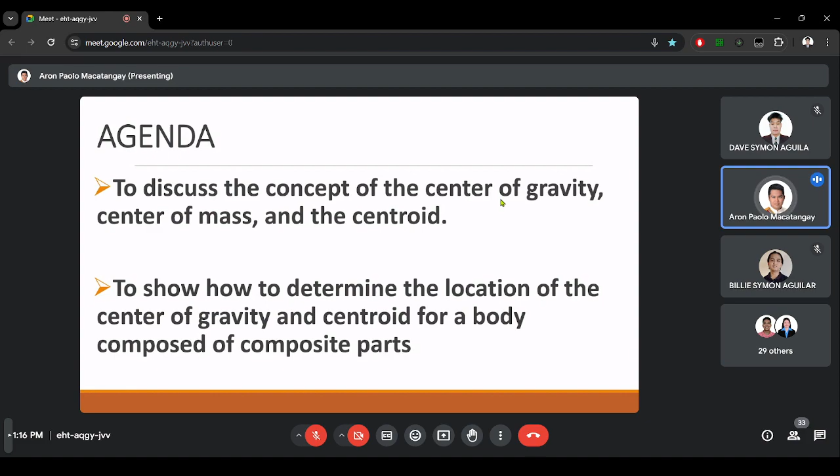So for as far as now, ang ating pagsasolve ng mga problems in cases when we are considering yung weight of the body. For example, kung maalala nyo, isa ito sa mga problems sa equilibrium, yung nasa left, tapos yung nasa gitna, tsaka yung nasa right, problem yan sa friction.

Okay? Ang ginagawa natin, automatic na natin, sometimes sa problem, yung tulad sa nasa left, binigay ng problem yung location ng G or kung saan location mo i-apply yung weight ng object.

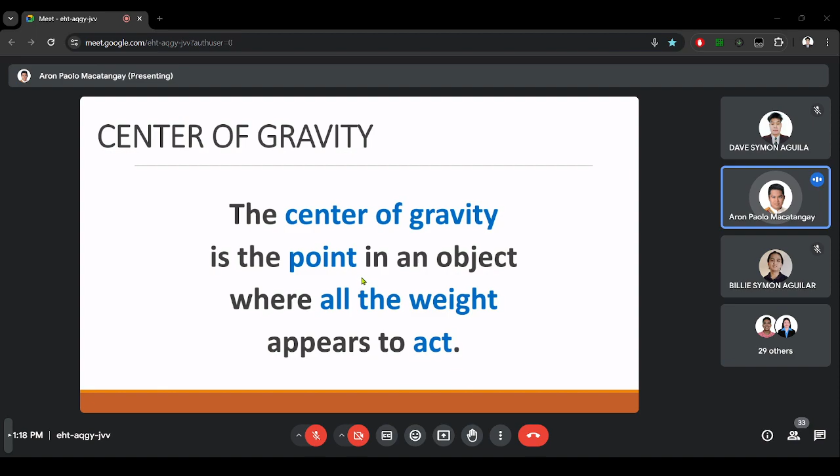Okay, so today we will be discussing saan nga ba dapat nilalagay yung mga ganyan. Bakit nga ba siya sa gitna? Okay, so yun yung, kaya natin siya nilalagay dyan sa location na yan is because dun yung center of gravity ng object natin. The center of gravity is the point in an object where all the weight appears to act. Okay, ibig sabihin, kahit malaki yung object mo, pag dun mo siya binalance sa center of gravity, it would appear or it would act na lahat ng mass is nandun lang and kaya mo siyang i-balance at that point.

Okay, so saan natin nakikita yon? If you know this toy, it's called the balancing eagle, uso to nung time namin, is kaya mo siyang i-balance sa isang finger mo. Right? It's because of the shape of the toy, the weight distributes such that the center of gravity is at the tip of the beak or the bill of the bird.

Okay, ibig sabihin, pag doon ko hinawakan yung toy, yung weight niya is nako-concentrate doon. And since nahawakan ko siya ng finger ko doon, parang nababalance ko yung object doon sa point na yun. Same with a ball, if you are very careful, kaya mo rin siyang i-balance sa finger mo. Kailangan mo lang i-imagine na lahat ng weight ng ball dapat mababalance doon sa gitna ng finger.

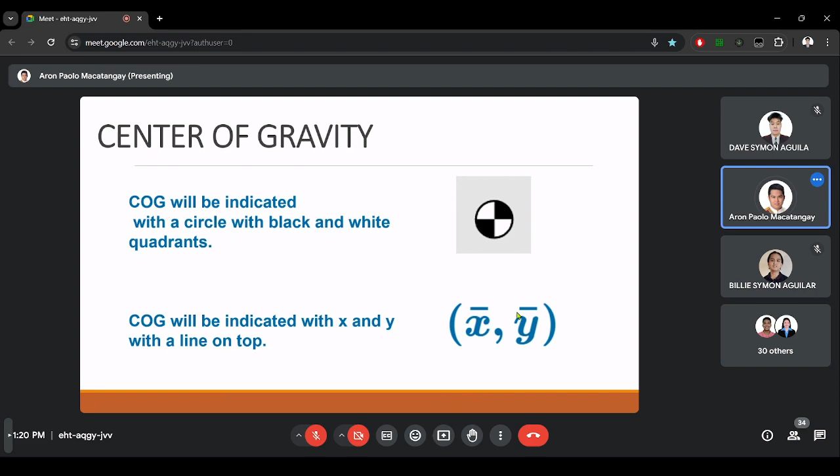Okay, so the purpose of the center of gravity is nandiyan yung center of the weight effect ng object natin. Okay, so ang ating magiging tawag dito, representation for that, we will indicate that with a circle, tapos may black and white pattern sa quadrants niya, tulad dito, opposite yung naka-shade. Tapos pag naman lalagyan natin siya ng label or coordinates, lalagyan natin ng x and y na, pero lalagyan natin ng bar sa ibabaw. So halimbawa, kung nasa 10 mm yung x coordinate niya, then 10 na may bar sa ibabaw yung susunod. Right? For y naman, ganun din.

So pag nakakita ako ng free body drawing or diagram, ganito yung makikita ko. Okay, meron akong mark dito for the center of gravity, may bilog siya with stripes. Tapos yung dimensions niya, dapat may bar yung value sa ibabaw. So I would know that dimension corresponds to the center of gravity of the object.

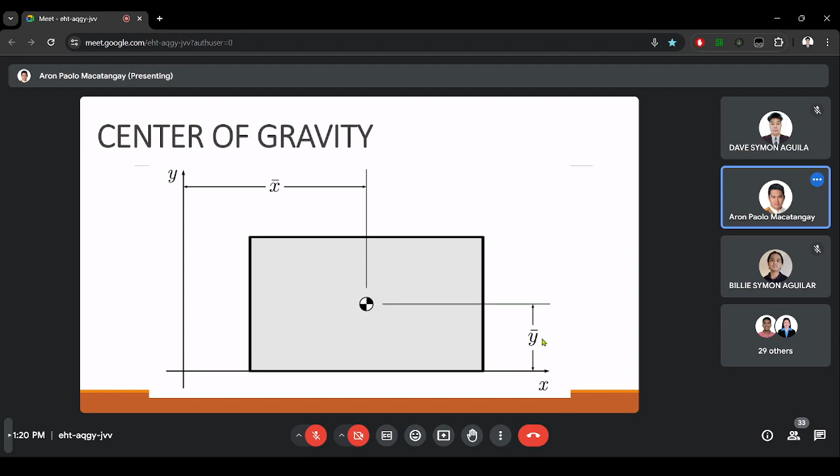So ano bang concept or saan ba nakakatulong yung center of gravity? So imagine nyo, meron kayong ball pen. Okay, and most ball pens, nahahati siya sa dalawang piece, yung part na may tip, saka yung part na may handle. Okay, sabihin, each part meron silang sariling center of gravities nila. And that means yung weight of every section is concentrated on those parts such that I can do a moment about point O of those two parts. Okay, so makikita nyo, both parts can cause a clockwise rotation or clockwise moment with respect to point O, which means iikot or papatak yung ballpen natin if we try to balance it at point O.

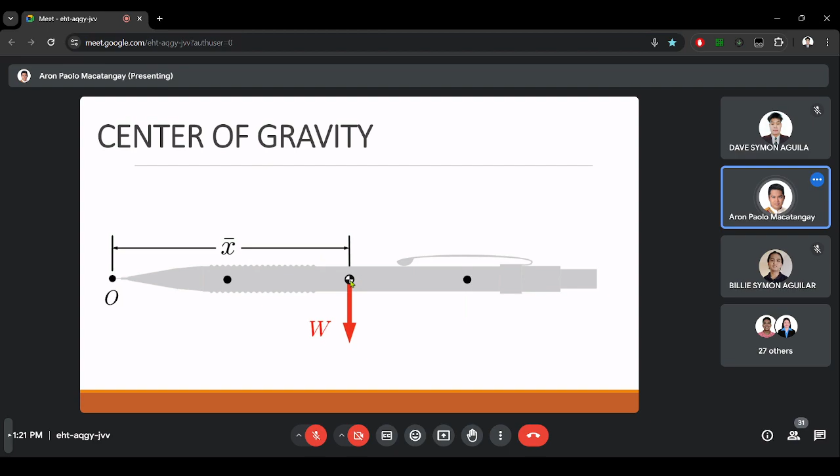What we do with the center of gravity of the whole pen is we balance it sa gitna, such that the weight on the left side and the weight on the right side—pag nag-moment ako about the center of gravity, yung nasa left side will cause counterclockwise rotation, yung nasa right side will cause clockwise rotation, and both will be in equilibrium.

Ibig sabihin, pag nilagay ko yung finger ko dito sa gitna ng pen, hindi iikot yung pen. Magbabalance lang siya on the tip of my finger. Ibig sabihin, pag sa COG ka nag-balance, dapat ma-cancel or mag-equilibrium lahat ng moments sa object. Which means mababalance mo siya, hindi siya mag-twist o mag-perform.

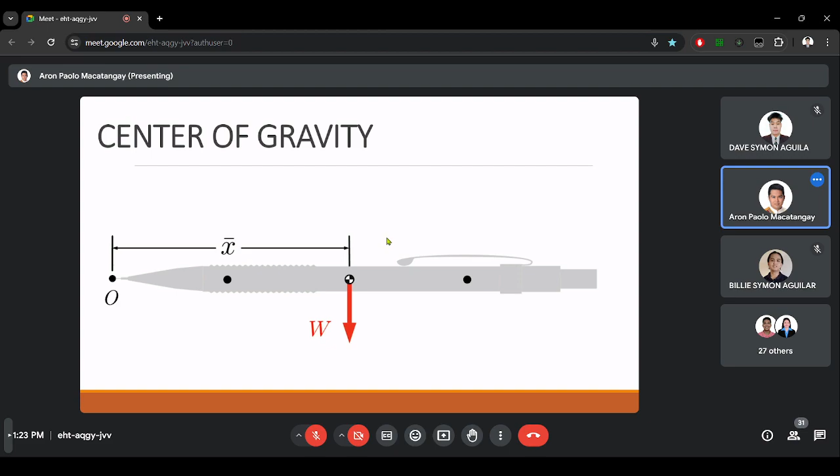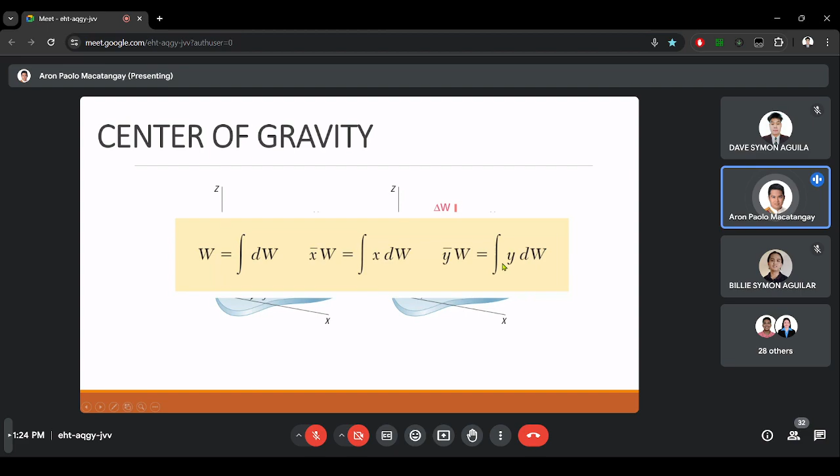Now, the history of how to solve center of gravity is actually based on the integral, which is this one. So any shape, pwede nyong hanapan ng center of gravity using equations like this. Pero later on, i-si-simplify na natin siya into standard formulas, kasi we will be using standard shapes for our solutions. I just want to show yung history niya dito, pero kung gusto nyong matuto kung paano i-solve ito by integration, pwede nyo gawin on your own pace, on your own time. Ang ida-discuss natin dito sa classroom would be yung based sa formulas.

Before we go sa formulas, i-define muna natin yung centroid, which is the geometric center of an area or a volume. And for objects with homogeneous composition, it is the same location as the center of gravity. For our discussion here sa subject, focus tayo sa homogeneous composition, ibig sabihin yung center of gravity natin will coincide with the centroid of the object, which is the geometric center.

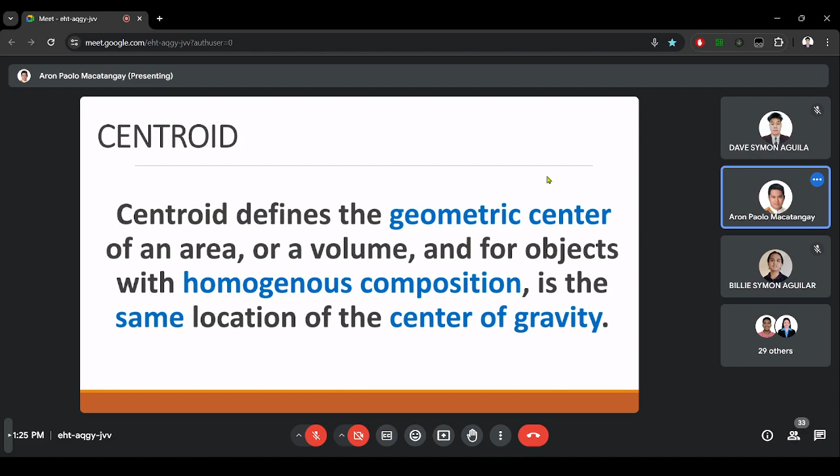Geometric center, ibig sabihin, kung square yan or rectangle, rhombus, circle, parallelogram, or a regular polygon, yung center niya is the location of the centroid. So yung mga ganong parts, parang hindi nyo na kailangan mag-formula, kasi ang centroid nun ay geometric center lang. Pero for other shapes, you have to use the formulas.

Ito, again, centroid, similar to COG or center of gravity, naka-based din sa integration yung derivation nila. So kung gusto nyong matuto tungkol dito, pwede nyo gawin on your own. Pero ito na, for standard shapes, geometric center lang yan, madaling hanapin. Pero for awkward shapes, kailangan mo ng formula.

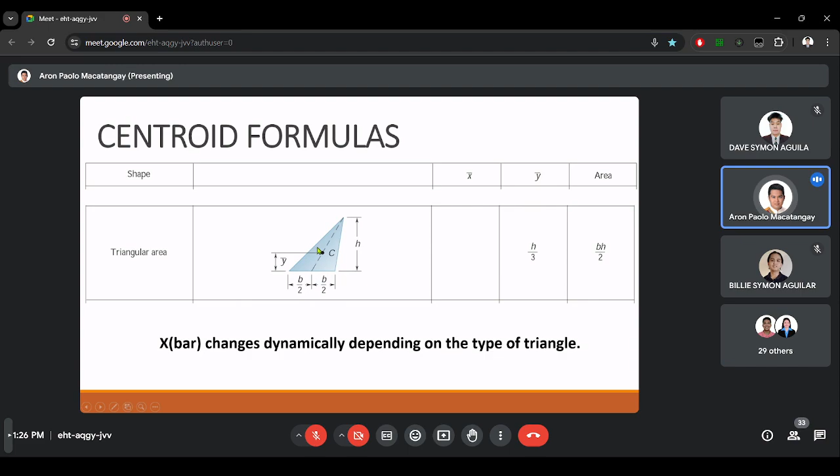So for triangular area, na hindi right triangle, the location of the centroid along the y-axis, yung vertical niya, is h over 3 with respect sa bottom of the triangle. Yung x component, blank siya kasi it changes dynamically depending sa type of triangle. Kasi you have to bisect the horizontal base, tapos kung saan dadaan yung line mo at kung saan siya mag-i-intersect dun sa y-bar, yun yung location ng x-bar mo. Medyo mahirap siya kunin.

But later on, I will show you a trick or diskarte on how to do this easier—well, for me, easier. Pero kung comfortable naman kayong hanapin yung x-bar niya using trigonometry and geometry, okay din.

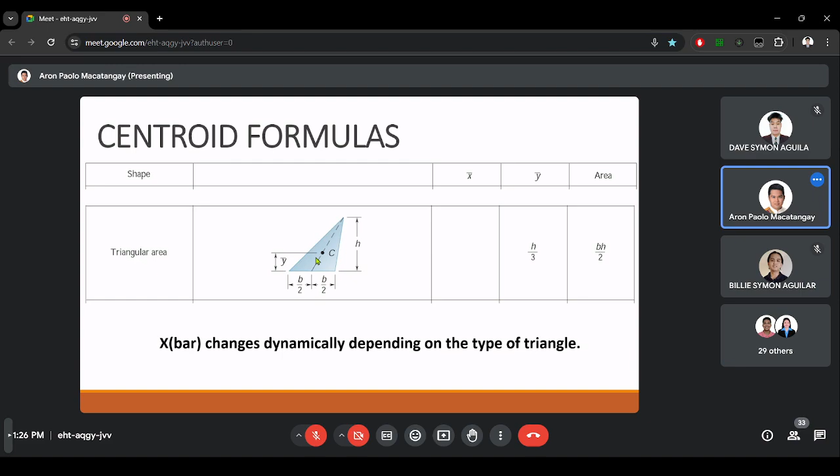So if the triangle is right, the formula for x-bar and y-bar would be just 1/3 of them—1/3 of B or 1/3 of H, with respect dun sa corner na naka 90 degrees. Yung B, kunin mo yung 1/3, yun yung X, location ng x-bar niya. Yung H, kunin mo yung 1/3, yun yung location ng y-bar niya.

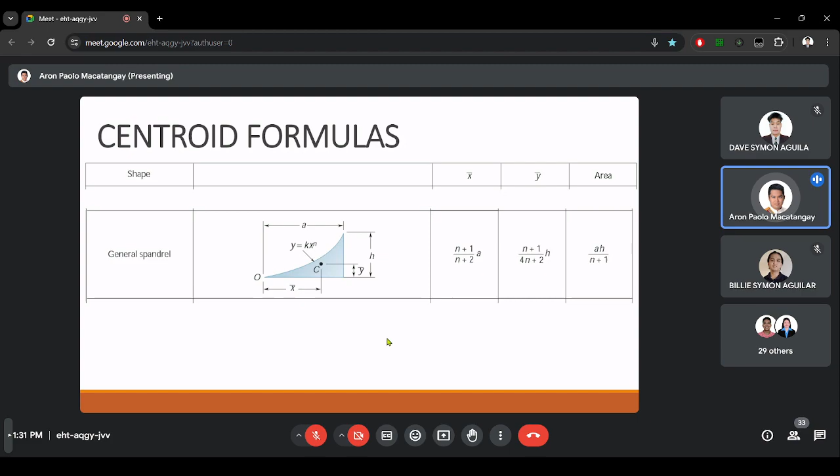Question po, and before we go to composite areas, this part medyo ano talaga siya, formula-based. Itong integration, hindi naman natin siya i-cover. Pero itong mga formula, need ninyo talaga, one, makabisado, and two, maging comfortable kayo sa paggamit sa kanila. Huwag kayong malilito sa X and Y, HA, etc.

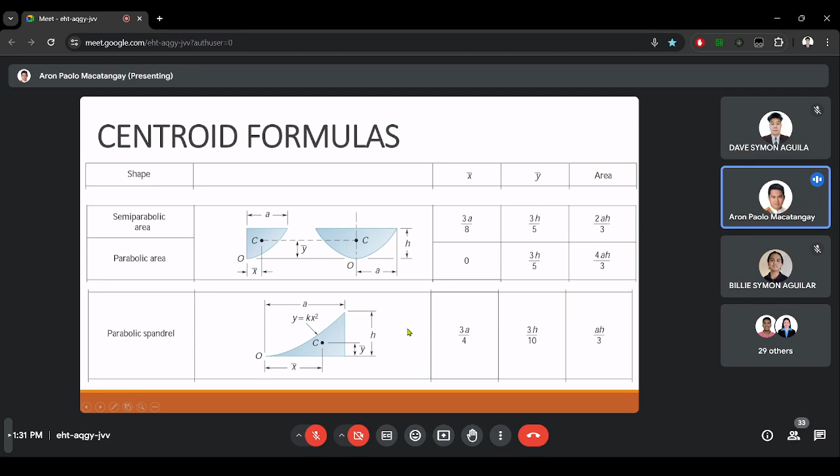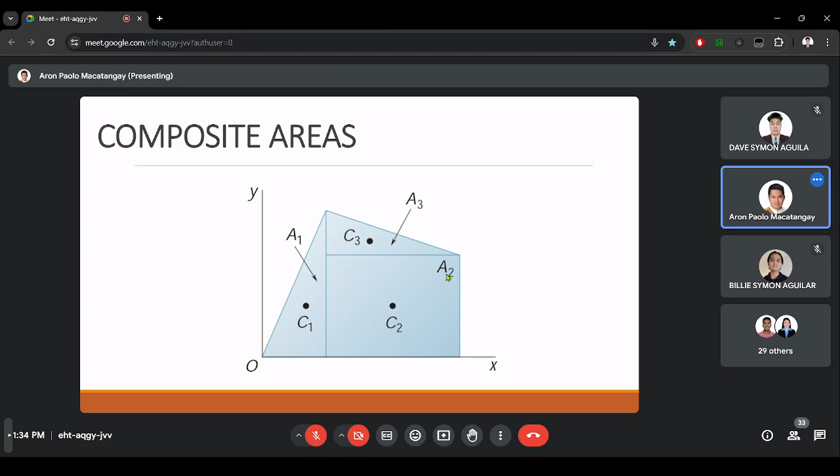So yung X bar, centroid x of the composite, times the total area of the composite, equal daw siya sa summation ng product ng x bar na maliit, that's the centroid of every mini area, times A, which is the area of each mini area or each micro standard shape. Dito, remember, may C1, C2, C3 tayo. Alam natin yung X bar, Y bar ng bawat isa, tapos alam natin yung area ng bawat isa. So ito yon, yung X bar of each times the area of each, multiply mo, then isasum mo yung products.

Equal daw yun sa X bar na malaki for the composite, times the sum of all the areas. Kaya dyan, usually ang unknown mo ay ang centroid of the whole: X bar na malaki, tsaka sa kabila, Y bar na malaki. Yun yung usually unknown, at given ka naman sa iba, kaya masasolve mo yung centroid ng buong composite area.

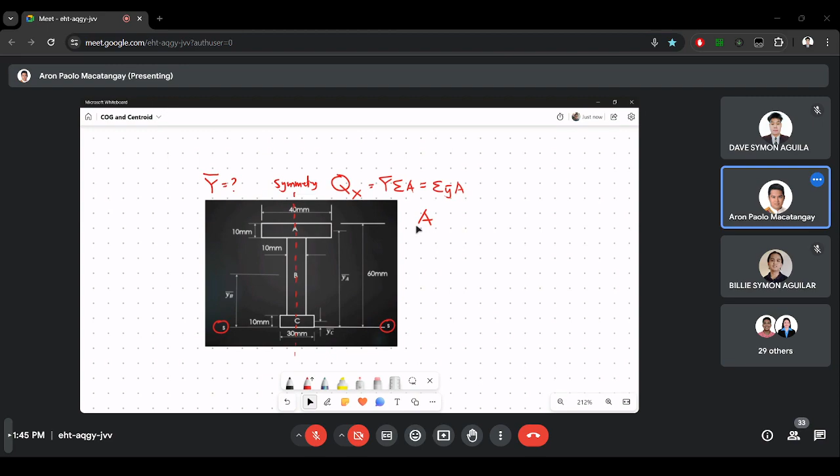I need to check the area of the composite shape, divided into mini areas. So I have 3 mini areas, A, B, and C.

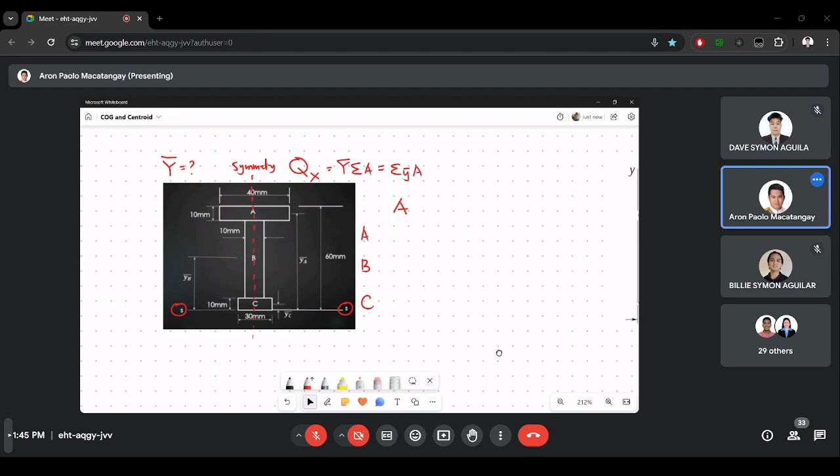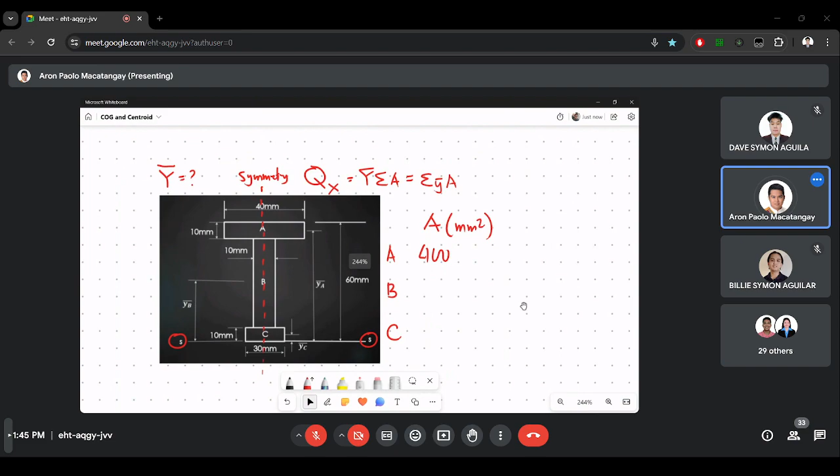For B, that's 10, then the other side would be 60. But you need to subtract the height, which is 10, and the bottom, which is also 10. This is 40 also, so 40 times 10, that's also 400.

Check if my solution is correct, and raise your hand if there's an error, because I'm solving this on the fly. For section C, it has 30 mm by 10 mm, so this is 300 mm squared.

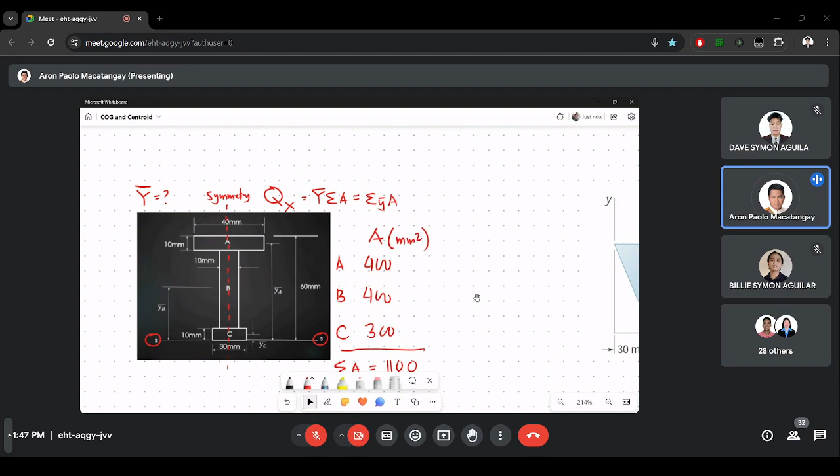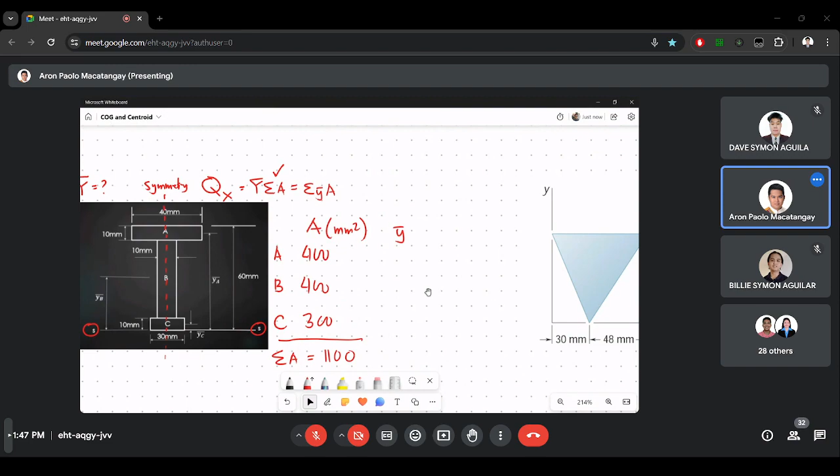So summation of A, checked. Now I need small y bar times A. So let me add a column for small y bar. For C first: remember, all my Y distances are based on or with reference to the SS line or SS axis, and going up is positive.

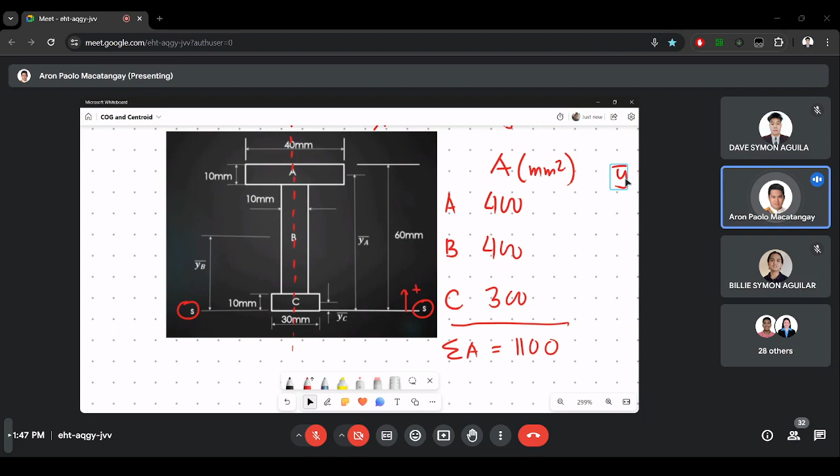For A, remember, our centroid, the small y, is the centroid of every small area. For regular shapes, it will just be the geometric center of the area. So for section C, my geometric center or centroid is Y sub C, this one. If the height is 10, the centroid would be half of that, so this would be 5 mm, because that's where its centroid is located. So Y sub C is 5 mm, I'll put 5 mm here.

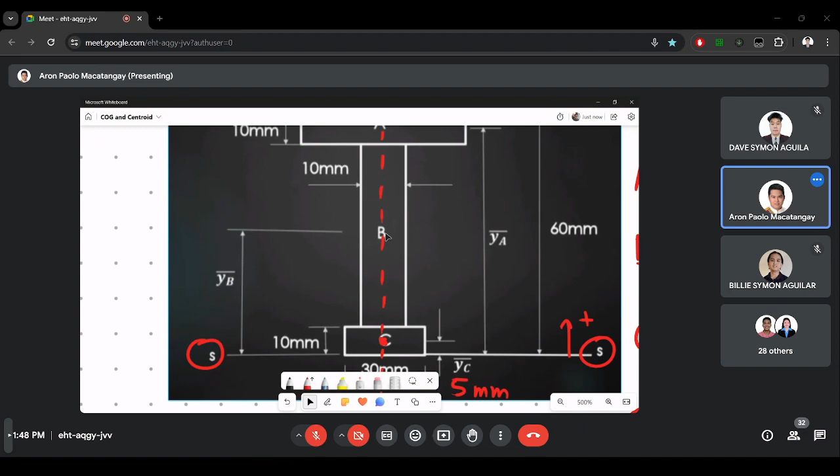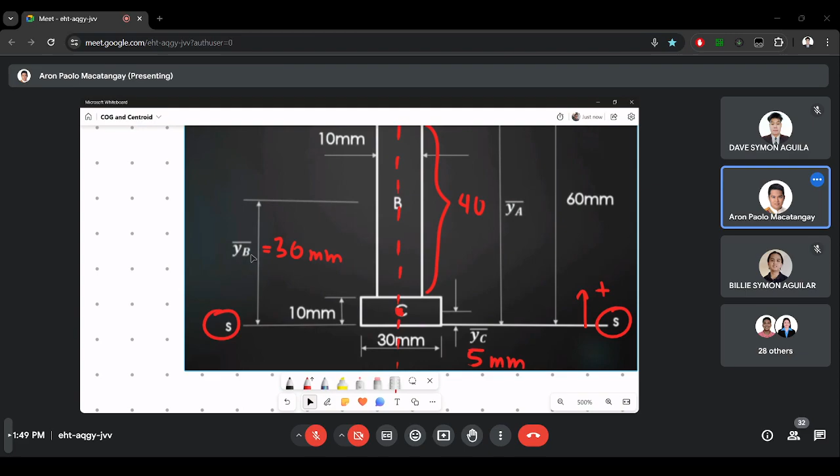Next, for area B, its centroid would be Y bar sub B, and it's at the center of the rectangle. So the height of my rectangle, as I said earlier, is 40 mm, so half of that is 20. But because there's 10 mm more below, I need to add that, so this becomes 30 mm.

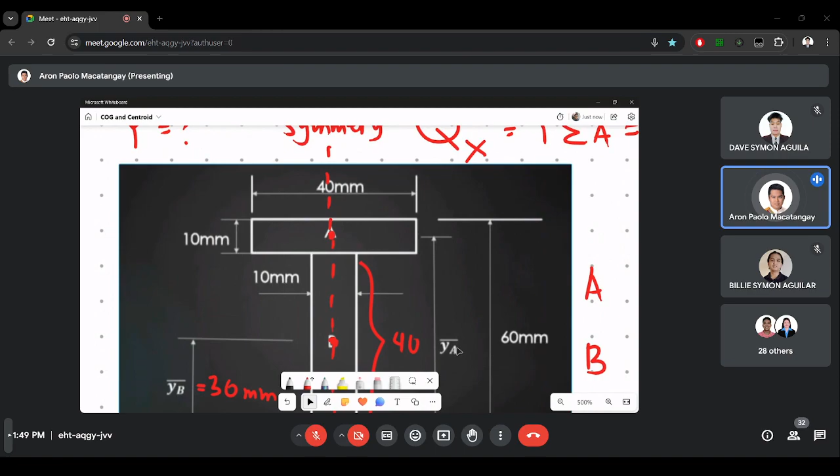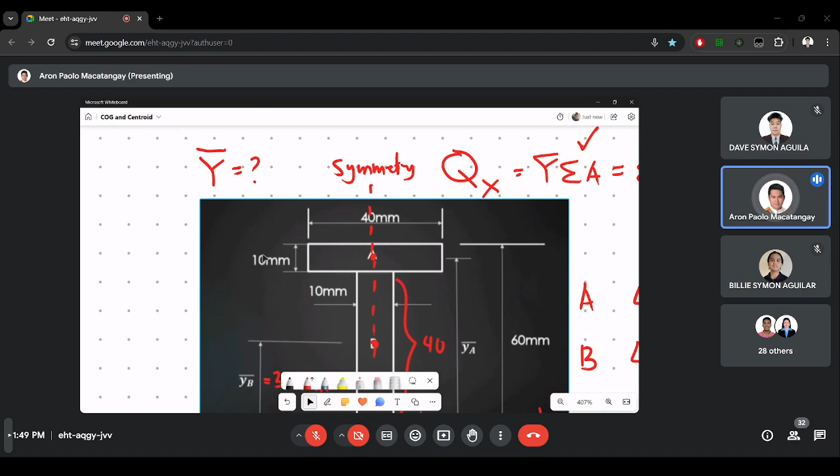And lastly, for A, the centroid is at the center. So that one is Y sub A. That one is 10, from the bottom that's 10, plus 40, plus half of 10 again, so that's 55.

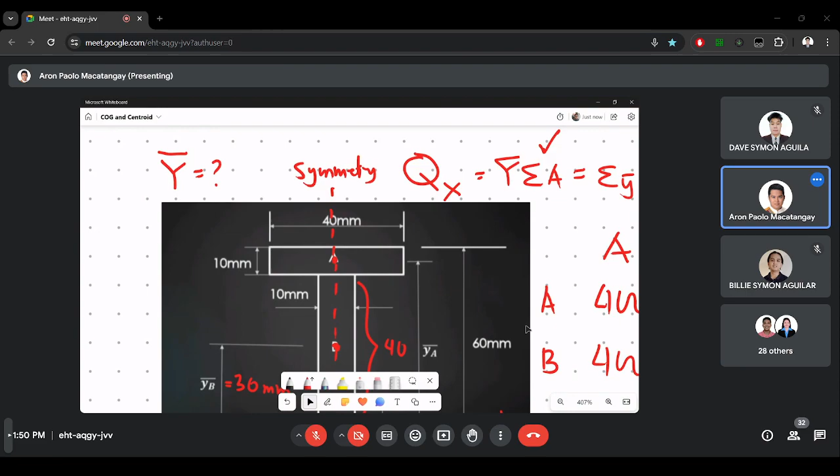So now I have my y bar, and remember, I need y bar A. So I need another column, y bar A, which is simply the product of my y bar and my areas. For area A, that's 400 times 55, so that's 22,000 mm cubed, because this is mm, millimeter squared, so it becomes cubed. For area B, that's 400 times 30, that would be 12,000 mm cubed. For the last one, that's 300 times 5, that would be 1,500 mm cubed.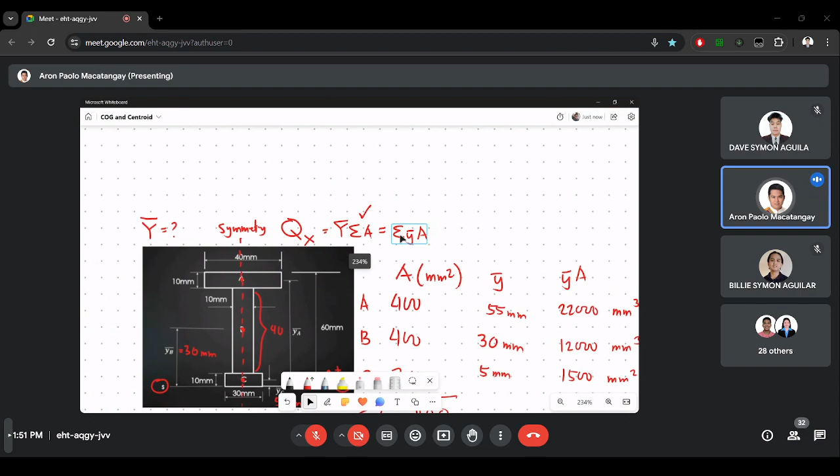So now I have my y bar A, but we said summation of y bar A, so I still need to get the summation of y bar A. So I just add them all together, and I will get 35,500 mm cubed.

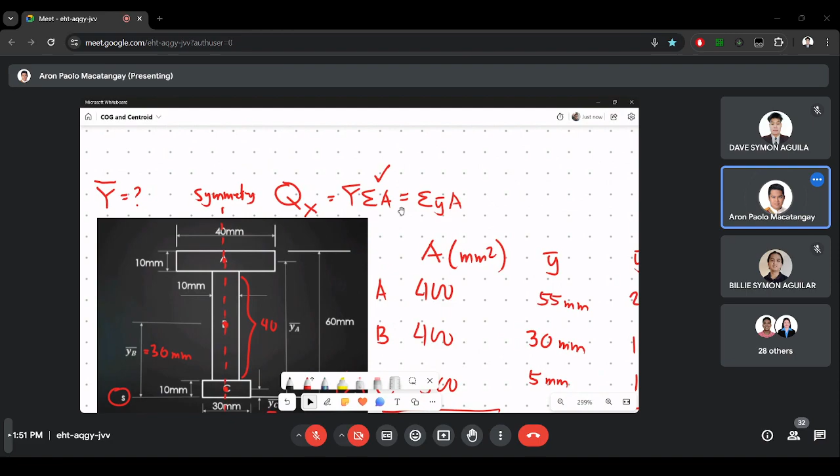So it says here, first moment of area with respect to x equals summation of y bar A. So this means Qx is now equal to 35,500 mm cubed. So that's one of my answers: first moment of area with respect to x, or the SS axis.

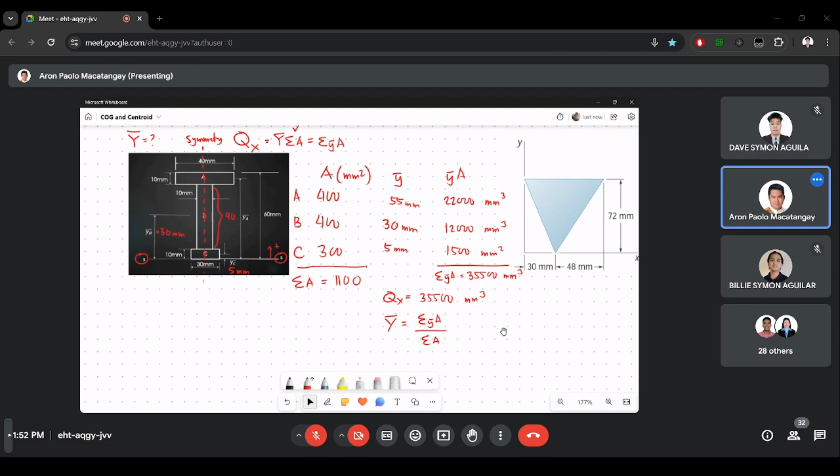Now after that, I need to find the y bar. For y bar, I would still use this equation: y bar times summation of A equals the summation of small y bar A. So to get y bar, I would just transpose the denominator, and get summation of small y bar A over summation of area. So summation of y bar A, this one, 35,500, over summation of area, which is this one.

So we can solve for a value. 35,500 over 1,100 gives us Y bar. May capital Y bar or the y centroid of the entire composite area will be equal to 32.27 mm.

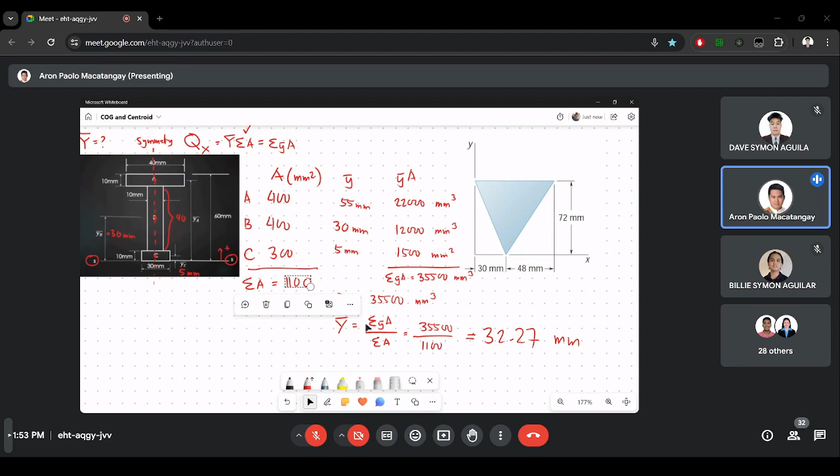So the implication of the 32.27 mm, nasaan siya dito? So kung ito ay 30, so kung this is 30, so yung 32, meron siya nandito.

Ibig sabihin, itong area na to, itong part na to, ito yung 32.27. So ito yung aking y-bar. Ibig sabihin, ito yung center of gravity ng object natin. So dapat, pag dinraw ko siya, ano yun? Meron siyang center of gravity.

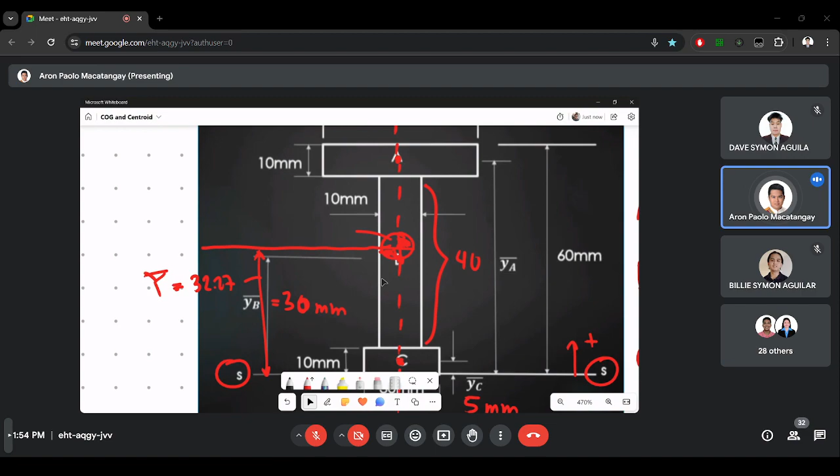Tapos, dyan na ngayon nag-a-act or nag-take effect yung weight or yung total weight of my entire area or entire body. Any question po?

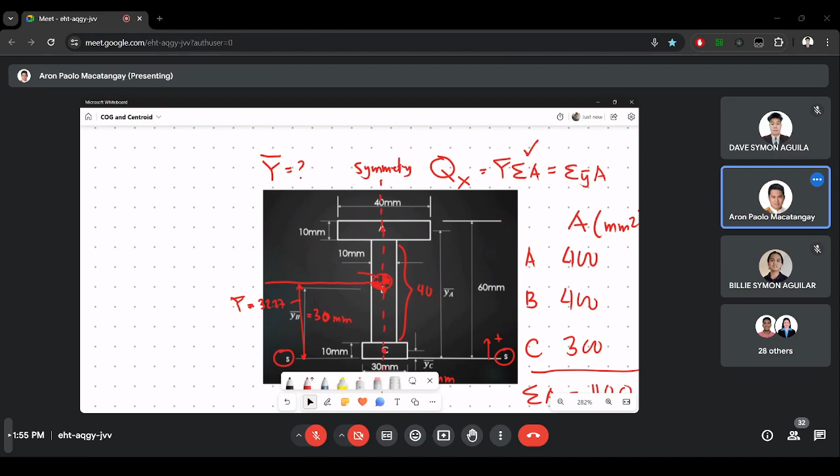So the challenge here is yung pagkuha ng, well, first, ay, hindi pala yan. Hindi pala yung next. Okay, ito muna tayo. Question muna before we proceed.

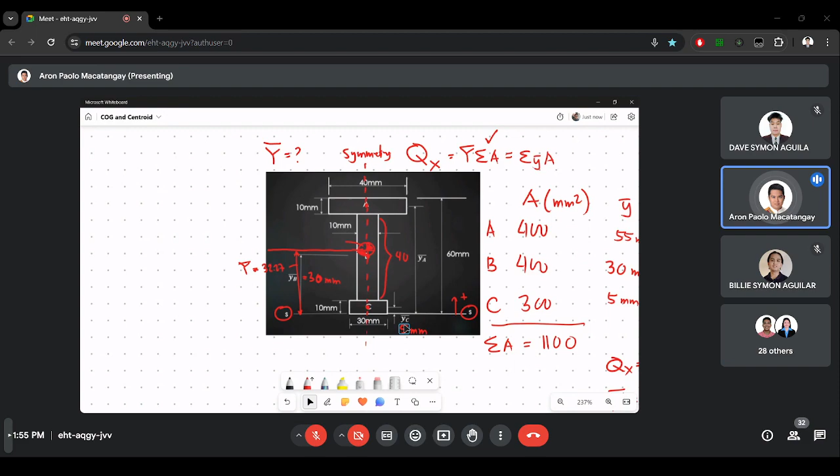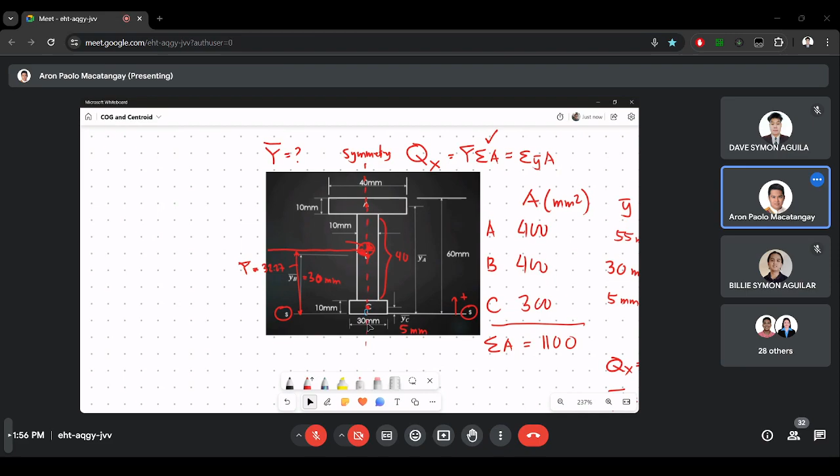So this one, easy lang siya because the shapes are all rectangular. So getting the individual centroids is easy, that's just geometric centers lang. Tapos huwag lang kayong malilito dito sa ating table, kasi ito summation of A, ito summation of Y bar A. Let's move ko lang to.

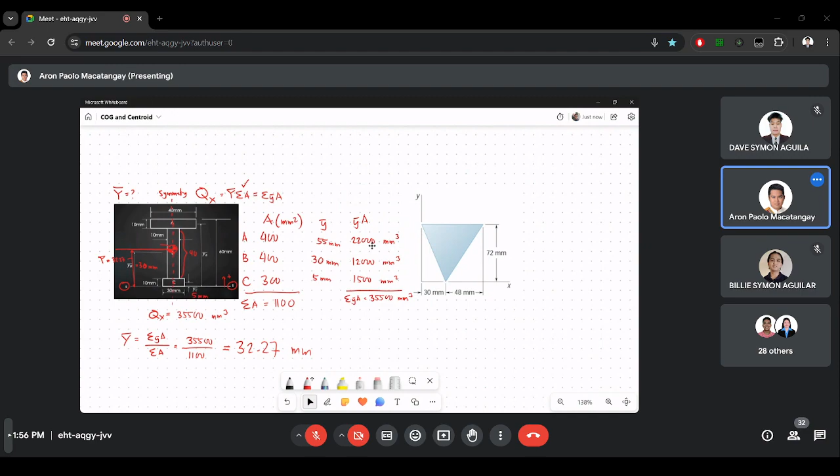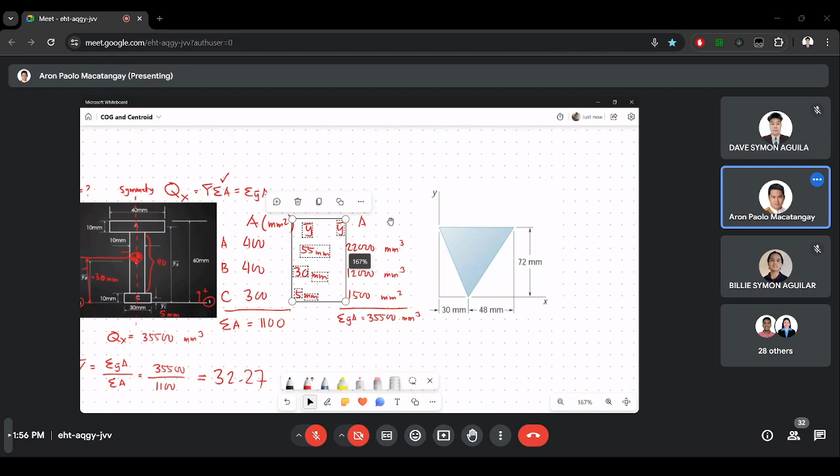Okay, move on tayo. So this one naman, it's a triangle. Ang goal again natin, find the first moment of area for the blue triangle. So dalawa yon, first moment of area with respect to x-axis, first moment of area with respect to y-axis. And then, hahanapin din natin yung centroid of the blue area, so that's dalawa yon, capital Y bar, capital X bar. So sabi natin, ito yung example natin na mahirap hanapin yung centroid ng triangle na hindi right triangle.

So ang gagawin ko technique, gagamitin ko yung concept ng negative areas. Paano yun? I will imagine this as one big area, one big rectangle. Tapos may dalawa lang akong void or tinanggal na areas. So this is isang area akong tinanggal, ito yung area akong tinanggal na pangalawa. I'll call it area 1, area 2.

So pag tinanggal ko yun, may iwan sa akin yung blue na area. So parang ang lalabas, I have a rectangle minus area 1, minus area 2, equals yung area nung triangle. So because of that, ito yung sinasabi ko na concept of negative area.

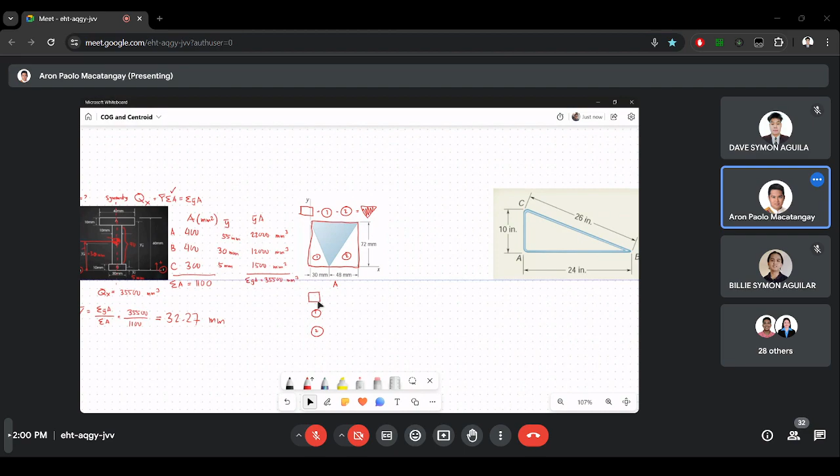So, A, hindi pala kasya. Okay, hindi pa tayo sa baba. So, I have A. So kunin ko yung X bar na maliit, Y bar na maliit, X bar A, Y bar A. Remember, both X and Y na yung hinahanap natin. So may separate X bar and X bar A, tsaka Y bar and Y bar A for both.

So remember then, pag right triangle, ang centroid niya ay h over 3. Pag rectangle naman, ang centroid niya is basically geometric center. So I would like you to try to solve this.

I will give you 10 minutes, para lang kasi mahaba-habang add and minus to eh, especially here. And then mamaya, let's solve this together using the wheel of names.

Pero sige, kunin na natin yung X bar and Y bar kasi yun yung medyo mahirap. For the square, sabi natin geometric center, so the X bar is just midpoint nung X natin. Okay, so ang midpoint, ang X natin is 30 and 48, so the midpoint there is 48, 78, 39. Kasi ang 0 ko, itong aking origin.

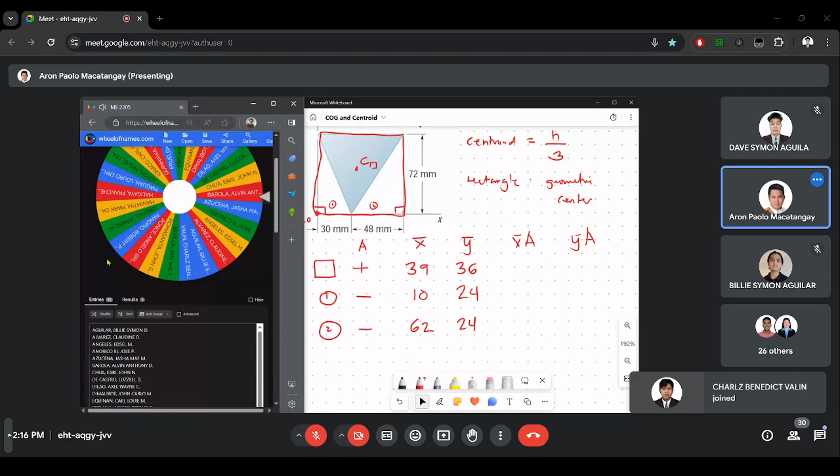Okay, solve natin. Uy, Alvin. Hello po, sir. Hello.

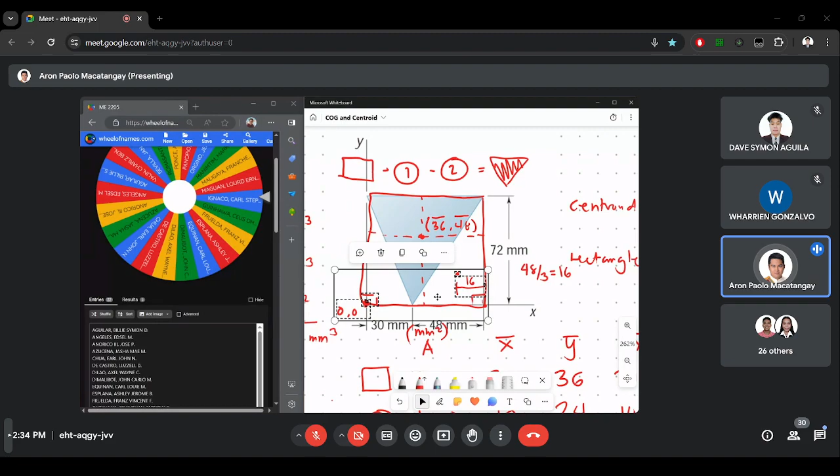So kung 48 plus 30, so 78 yan. This part na naiwan would be equal to 62. So 62 dapat yung ilalagay ko sa table, kasi siya yung distance ng centroid ko with respect sa 0,0 or sa origin.

So huwag nyo isusulat 16 kasi yung 16 naka-base yan dito sa point na to. Dapat laging base sa 0,0 yung ating X bar and Y bar. Kung nalipat ko yung axis ko in a different place, mag-iiba din yung values ng X bar and Y bar, kasi gagalaw sila to adjust para dun sa new location ng origin point.

Gets ba yun, Wharrien? Opo, gets na po. Thank you po.

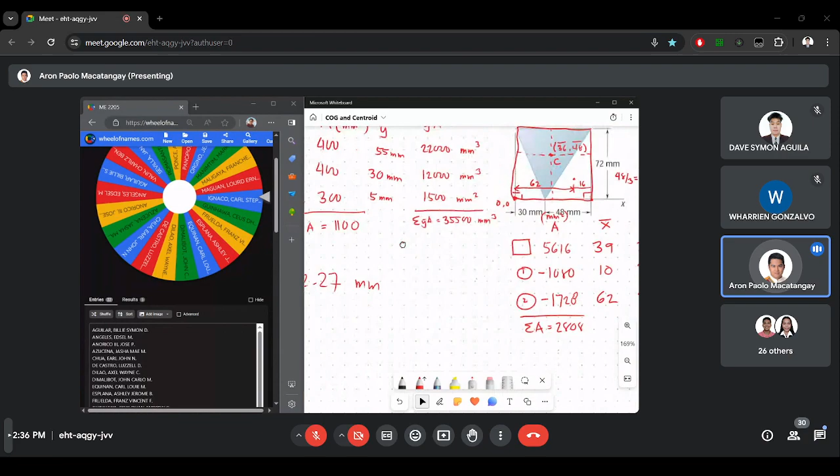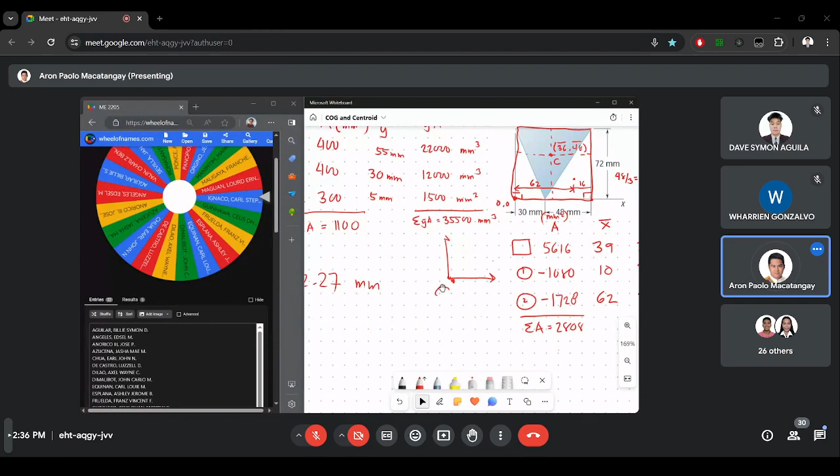So always, bago nyo isulat to, check nyo muna kung nasan yung X and Y axis nyo sa drawing. Minsan kasi nasa gitna yan, minsan nasa gilid tulad nito, minsan naman nangyayari malayo. Nandiyan yung drawing, pero yung x and y axis mo narito sa baba. So lahat ng sukat mo, dito pa rin magbe-base sa 0,0. Kahit malayo doon, lahat yan mag-a-adjust.

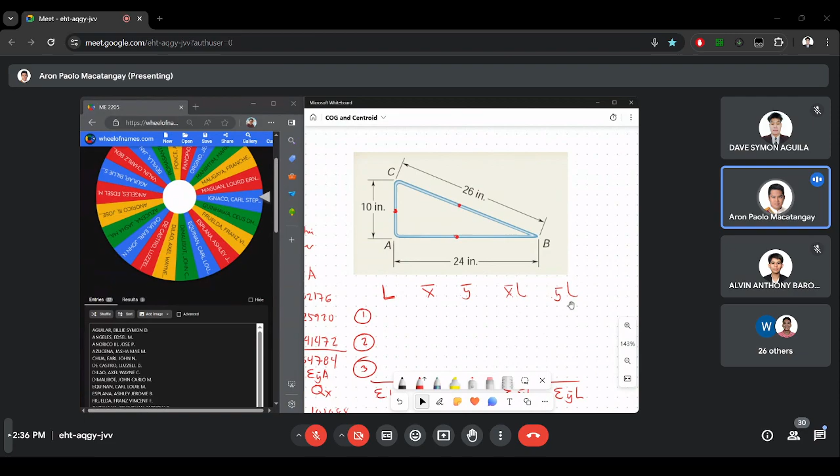Pero kasi ito, lengths yung given. So I would like you to compare and figure out paano kung length. Kumbaga, hindi ko na ituturo yung way. Similar way lang naman, pero lengths kasi ito. So try to learn how to solve it kasi i-mirror nyo lang naman yan dito. Dito kasi area.

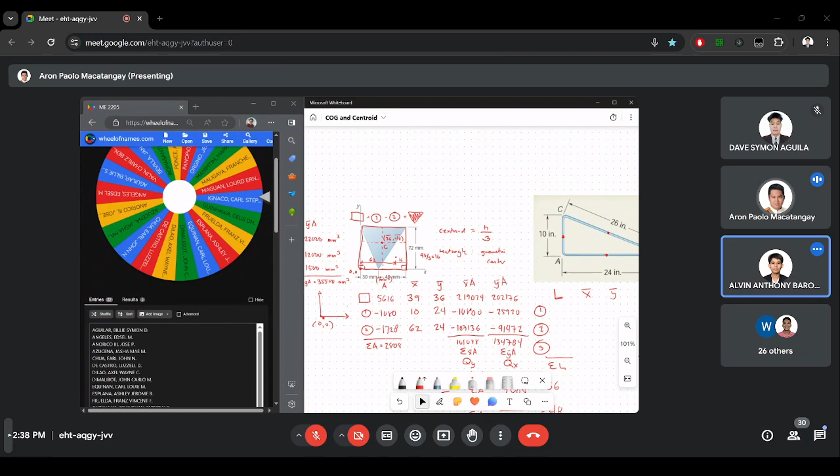Ay, may yung, ba't nga ba tayo na yung isang subject nyo, yung nagsa-Sunday ng face-to-face, Alvin, is Saturday na ulit siya next week. So Saturday tayo. Sir, parang Saturday po dahil medyo po kami sa kanyang ipapasa ng face-to-face next Saturday. So back to normal programming tayo Saturday. Opo, bale doon po ulit tayo sa CIT ano po.

Hahanap na lang po kung saan malamig-lamig. Kung may hanap pa yung iba, okay lang naman. Hindi kayo yung maghanap, sabihan nyo lang ako. Thank you po. Sige po. So yun lang muna, last topic na next week.